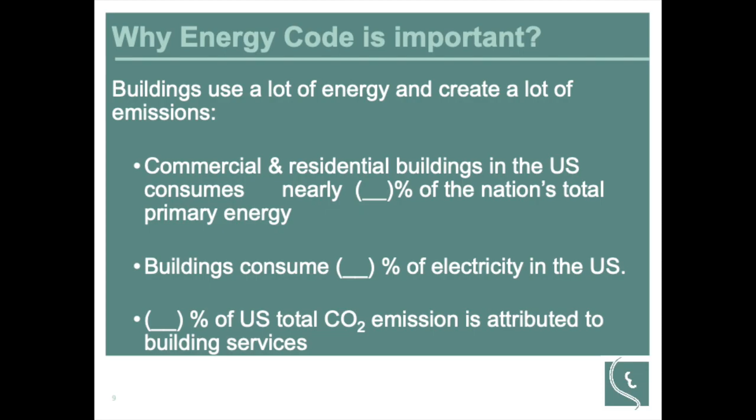So what's the benefit if you comply with the energy code? Based on DOE research, if all buildings in the US comply with the current energy code and keep that trend, it will reduce energy consumption by 3.5 quad BTU per year, reduce CO2 emissions by approximately 3%, and save almost $30 billion by 2030.

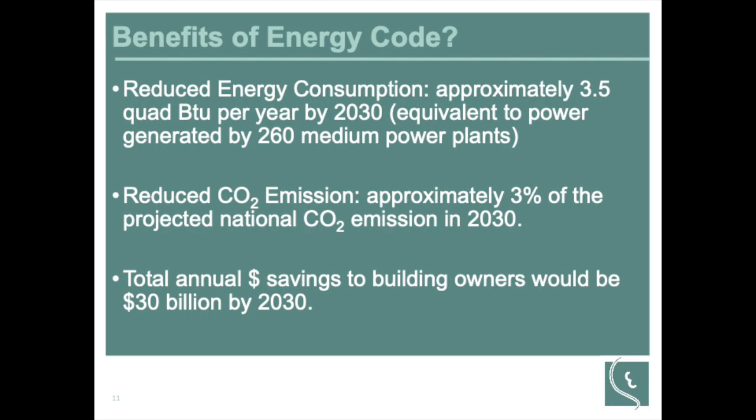Now we're going to talk about the Illinois Energy Conservation Code, which is slightly different from IECC. IECC, International Energy Conservation Code, is the model code, the standard code. But Illinois Energy Conservation Code is slightly different from IECC, and we're going to talk about how and why.

This is a good website to learn the basics of Illinois Energy Conservation Code: the CDB, Capital Development Board, website. They're in charge of adopting and processing that legal stuff in Illinois. They describe the Illinois Energy Conservation Code as requiring design and construction professionals to follow the latest published edition of IECC and ASHRAE 90.1, including amendments adopted by the CDB.

State-funded facilities must comply with ASHRAE 90.1. Privately funded commercial facilities, so all commercial facilities other than state-funded, must follow IECC. And residential also follows IECC. That's the big picture of what Illinois Energy Conservation Code is and what model code you're supposed to follow.

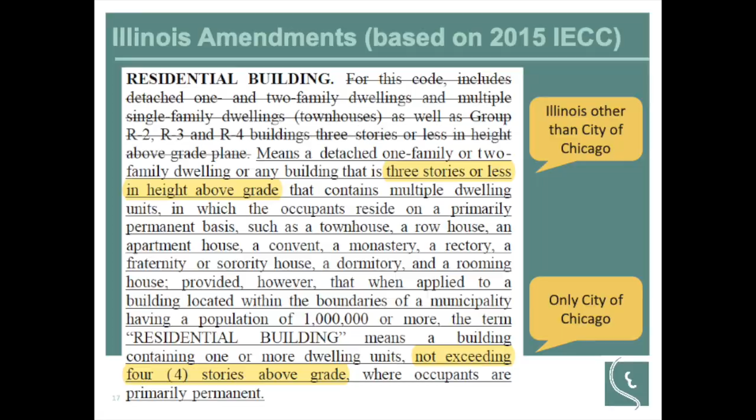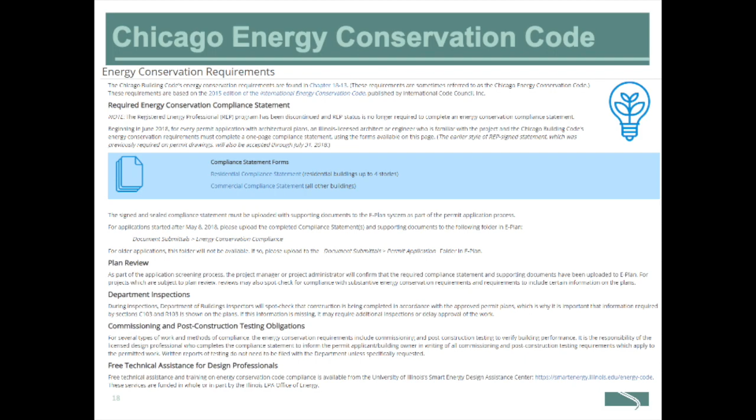So this is a screenshot from the Chicago Building Department. It explains well what the Chicago Energy Conservation Code is and what process you need to go through to get a permit. We'll talk about the compliance statement form later in more detail. I want to point out the last item: free technical assistance for design professionals. It says this is done by U of I SEDAC, which is us. In Illinois, for energy code training and technical support, we are the hub. So if you have questions, let us know.

This is an example of the Chicago Energy Code or Chicago Amendment. They're just changing some language, saying code official, City of Chicago department of buildings, or building commissioner. In terms of historic buildings, if it is listed as a Chicago landmark, or listed in the Chicago Historic Resources Survey, it is considered a historic building in Chicago.

Another important thing in the Chicago Building Code is the roof solar reflectance and thermal emittance. That's the IECC section. Chicago amended this and gave it a different name, calling it the Urban Heat Island Provision. Originally the IECC section only applies to zones 1 and 2, I believe, but Chicago now says if your project is in Chicago, you need to follow this heat island provision. This is a requirement, and there is some requirement language here. The Illinois amendment doesn't have this - only the Chicago amendment or Chicago Energy Code has this one.

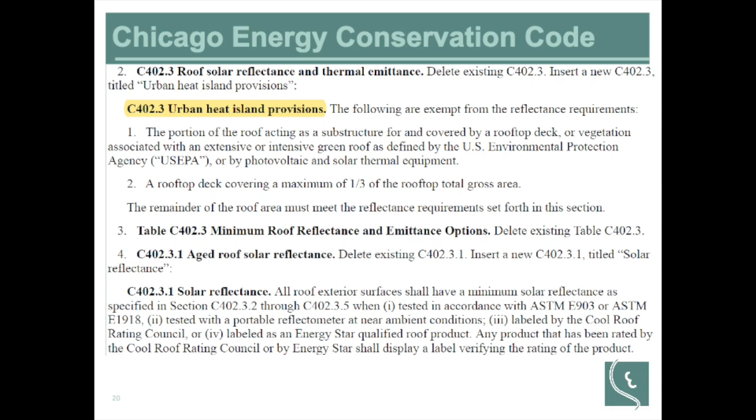Another big change I want to mention - how many of you are familiar with REP, Registered Energy Professional? Great. So now it's gone.

Before, to process your permit or plan review, what you needed was this one-page document signed by a REP, which is a Registered Energy Professional. A Registered Energy Professional is a licensed architect or engineer who went through at least one energy code training - then you are REP. The Chicago Building Department used to keep a list of REPs, and you could only sign this document if you were listed there.

Now they changed it. This change happened in June 2018, so this is pretty new. You don't need to be listed as REP anymore. This is a new form you can download from the Chicago Building Department. What has changed is the language is kind of similar, with your contact information, and you still need to be either a licensed architect or licensed engineer, but there's no requirement for you to be listed as REP.

They added this compliance method here, which I think is a great idea. Effective June 20, you need to use this form. As I said, there are two forms, one for residential and one for commercial. The top part is the same for residential and commercial, but the bottom part is different.

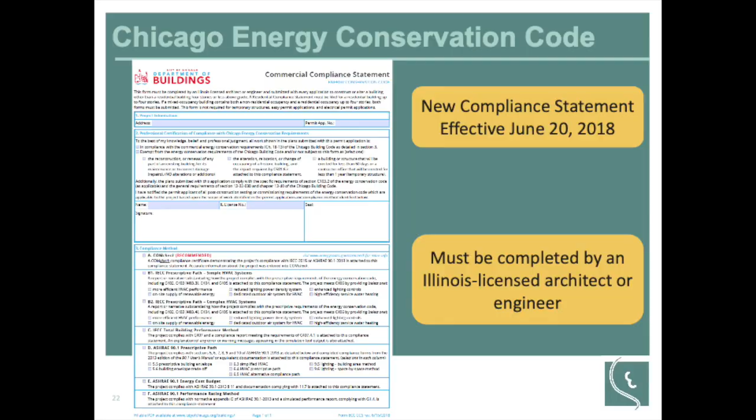If I blow up the bottom part for commercial, it's a compliance method. You need to check which compliance method you are using to comply with the Illinois Energy Code - only one, right? Correct, you check only one. It's either COMcheck, which is recommended - I feel like probably 80-90% of projects do COMcheck. But if you want to do other than COMcheck, you can check either prescriptive path, and there are two under prescriptive path: simple HVAC or complex HVAC. So basically either COMcheck, prescriptive, performance, or ASHRAE 90.1. You pick and choose what compliance path you are choosing, and then you need to show documentation that you are complying with those requirements.

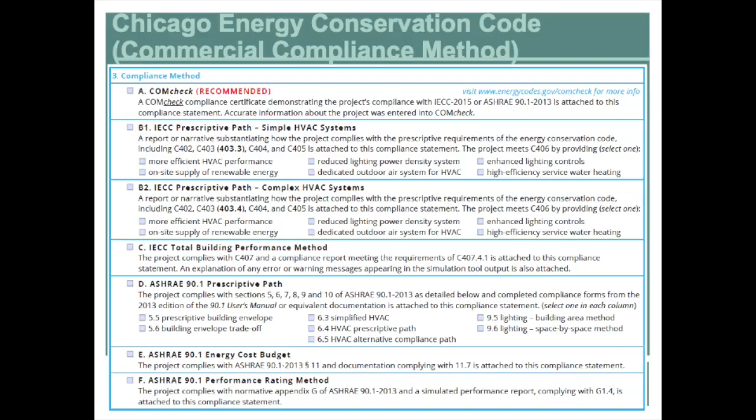For residential, similar things - you either check REScheck, which most projects submit as a REScheck report for compliance, but if not, you can do prescriptive method or performance method. Under performance, there are two: simulated performance method, and energy rating index. You can think of these two as performance, meaning like energy code. The last one, ERI, is a HERS rating. So if you're doing HERS rating, and that's the compliance path you chose, then you check this.

The part I like in the residential form is they have a snapshot, very short, that says the following mandatory provisions also apply to all residential projects - meaning no matter which path you are taking, these are mandatory. There are some lists of sections; it doesn't explain all the details, but it's a good starting point for you to make sure you comply with this.

Currently, the city of Chicago doesn't really enforce duct testing or blower door testing. However, it's mandatory. Can you speak at all to that?

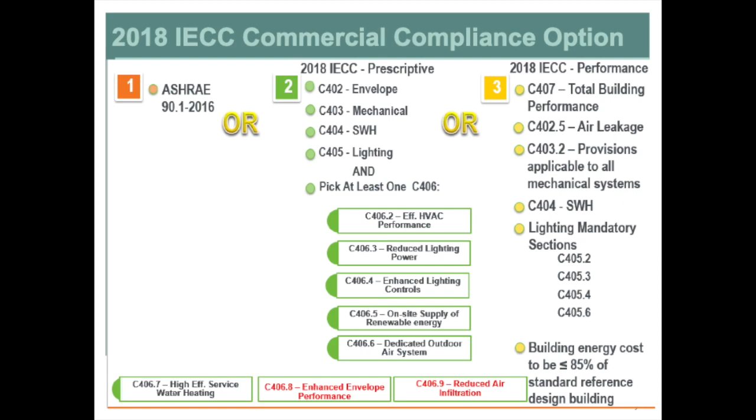For residential, in terms of big picture, there are actually 2 paths: one is prescriptive, the other is performance. But inside the performance path, there are 2 different performance paths — one is simulated performance, and the other is ERI, which is HERS. So if you go through prescriptive, you need to follow all the prescriptive requirements as well as all the mandatory requirements.

How many of you have worked on a project following the HERS rating compliance path for residential? How many of you are interested in residential provisions of the energy code? And commercial? Okay, so we're going to cover both commercial and residential, but probably spend more time on commercial.

So those are the two big compliance paths, commercial or residential. But sometimes knowing whether you need to follow the commercial or residential provision isn't clear cut. At least it wasn't for me, so I want to go over this to make sure we're on the same page.

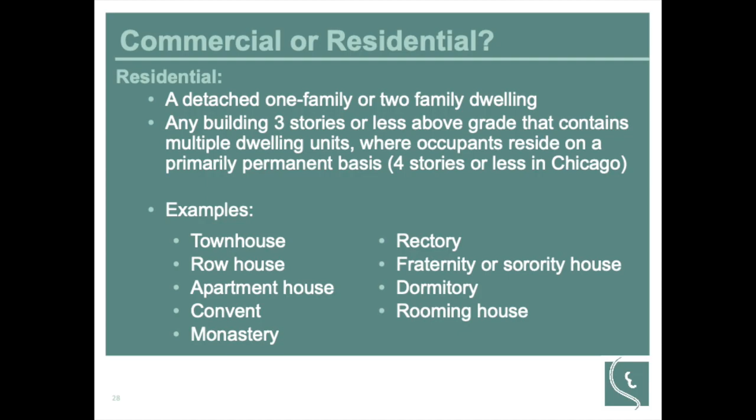So to give you a small quiz: there's a 5-story mixed-use building with 2 stories of retail store and 3 stories of apartments in Chicago. Is this a residential or commercial building? Commercial building, because it's mixed use and more than 4 stories.

Easy. The second one: a 3-story mixed-use building with 1 story of retail and 2 stories of apartment in Bloomington. Commercial or residential? Commercial? Excuse me, it's actually a mixed-use residential building. It's a little tricky. It should be clear cut, but sometimes it's not.

Third one: a 5-story single family home. Commercial or residential? I think everybody gets hung up on the 5 stories, but it's single family, so it's unusual to see a 5-story single family home. But if there is one, it's still a residential building because it's a single family house. Technically, if it's a 10-story single family house, it's still a residential building, so you need to comply with residential provisions.

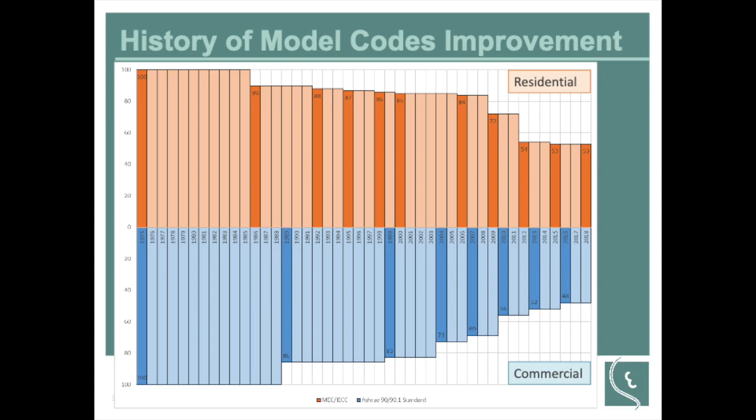So, the 2018 IECC - I know some of you are probably a little disappointed we didn't hand out the 2018 code books, but unfortunately our funding doesn't cover books for everybody. Good news is if you go to the ICC website, or come to our website where we have a link, there's a web version of 2018 IECC. You can scroll down and search for keywords, which is very convenient. But you cannot print, you can only look at it on the computer. So at least there's a resource for this.

A little bit of highlights on changes for commercial provisions of 2018 IECC. If you remember the graph, the energy consumption is almost the same. In terms of commercial provisions, it's about a 2 to 5% improvement compared to the previous version, which is 2015. As for the mechanical section, I think IECC is personally better than ASHRAE 90.1 in terms of complexity, but it's still very confusing and complicated.

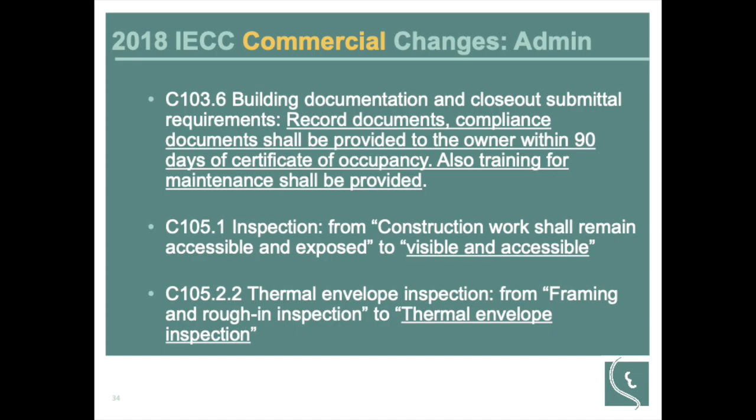Another small language change: there's a thermal envelope inspection. It used to say framing and rough-in inspection, and now it says thermal envelope inspection. I take it this is more comprehensive—not just framing and rough-in, but making sure all the air barrier or vapor barrier, the insulation, no thermal bridging, so there's integrity in the whole thermal envelope.

And then another big change, code official. Do we have code officials here today?

No, none. There were 2 signed up. They didn't come.

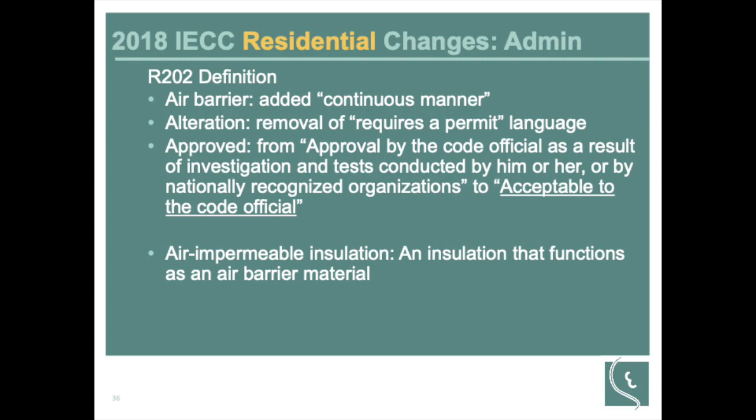So looking at the commercial, most of you guys are interested in the commercial side of things. But I will call out for some of these slides where I have black text up in the left corner. This is not a change, but it's something that we wanted to call out as a very important factor.

This is a question that we frequently get: can I do this without complying with the thermal envelope provisions, and can I get away from some of the insulation values? We point back to this and say, well, you might, if you can qualify as a low energy building or portion thereof. This gives the definition under 1 watt per square foot.

Have any of you been doing much in the way of passive house construction or design, or familiar with passive house? A couple more for passive, at least familiar with it. This is getting down to about that level that they look at. I believe Passive House looks at under 3.2 BTUs per square foot, and this is 3.4.

This is something that, if we're going to get to net zero, is going to have to become much more common practice rather than the exception to the rule. But if you're under this threshold, that simplifies things a fair bit.

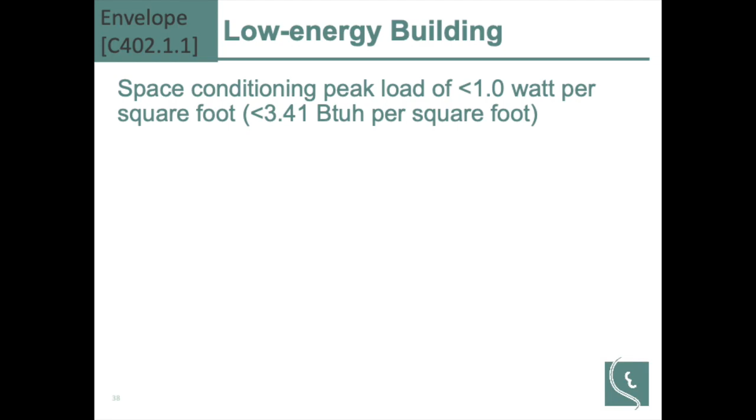So here's a question that came in: how does it apply to buildings without heating? There again, with the IECC, it notes that if you're low energy, you don't have to comply with the thermal envelope provisions, but the rest of the code still does apply. So you still have to have good lighting and good HVAC systems.

However, we do note that if you start this as a low energy building, say I'm going to build a building shell but I'm not going to put any air conditioning or heating in it, particularly warehouses and things like that, where one firm is going to build it and then rent it out as space to others, so they're not going to condition it when they do the construction.

That can be fine, but when your tenant moves in, if they want to condition that space, going back and complying with that thermal envelope provision, if you didn't when you did construction, that can be very costly and expensive to do. Particularly if they say I want a heated slab, because as we'll touch on in a moment, you now have to insulate under that slab. So you're going to have to rip the whole slab out in order to do it.

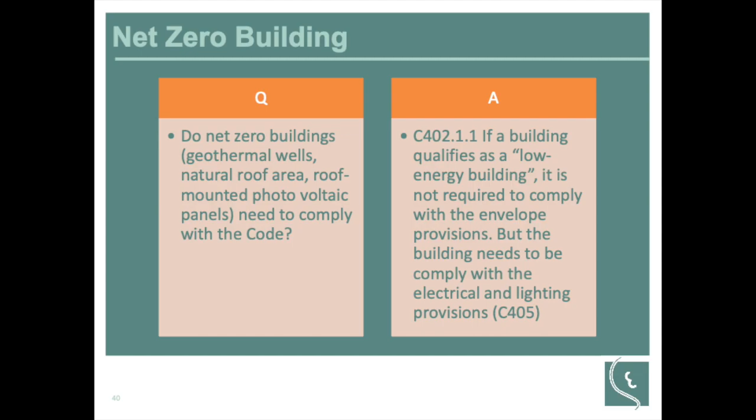This was another one: we are going for a net zero building, do I have to comply with energy code? Again, we can point back to the low energy building. It seemed like a strange question to me, and you guys might agree or disagree, but if I'm going for a net zero building, then saying, do I have to meet the minimum standard? That was a little bit weird.

So this goes back to the heated slab that we talked about. Now in the 2018 version, if you have a heated slab, you have to insulate under it a minimum of R5, so typically probably 1 inch of foam underneath that slab.

Does that mean if the building is conditioned with heat in there, or do you actually have to be providing heat using the slab? So that's probably going to be a radiant slab, not just a slab in a heated building, but you're actually putting the heat directly into the slab.

There again, they say a minimum of R5, that's 1 inch of foam. Any ideas what it might cost to put a 2-inch piece of foam down there instead of a 1-inch piece? Now you're getting into comfort and saying, can I build a better building that's going to be more comfortable? Yes, I have gone beyond code to do it, but this may be one of those where if you're doing a COMcheck and you may want to trade something, I'd much rather provide a more comfortable building using some of that.

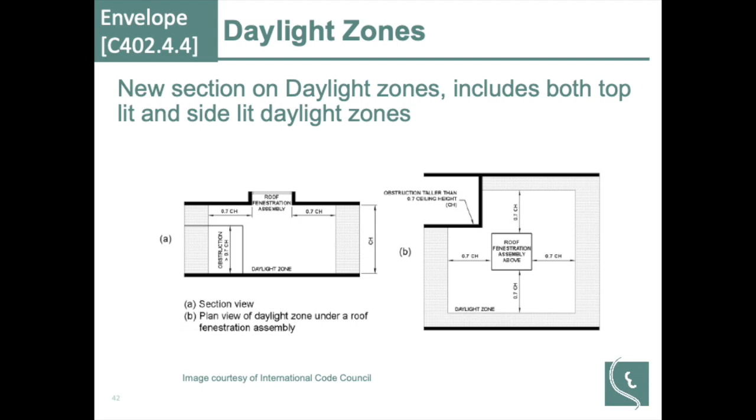So here's something where how it may appear on a drawing as far as identifying, and this is required in the documentation, is you have to identify your top lit and side lit zones on the floor plans. So in this, we've got some windows here. I don't have any skylights in this building, so I don't have any top lit zones in the core of the building. But here you can see the side lit zones coming in, and depending on if I'm over the wattage threshold, I may have to install daylighting controls in here.

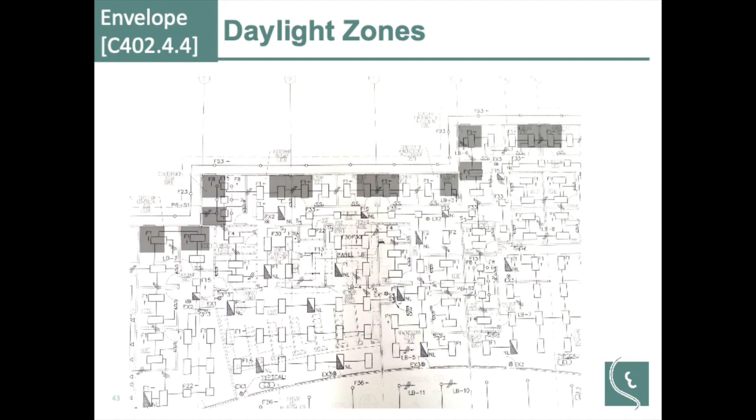So, air sealing. I think it's probably something where we've kind of understood practically that air sealing has to be able to be maintained for the life of the building, not just the day I put it in. And so understanding that the air sealing has to be able to allow for the expansion, contraction, shifting, vibrations of the building without cracking and defeating.

I can use drywall with some mud on it to provide air sealing. However, when you do, over the life of that building, as cracks develop, your air barrier is failing. And that can cause you some problems going forward in your building. Again, trying to look at these buildings from a lifetime perspective. We don't want to build buildings that are only going to last and stand for 10 years.

You know, how many buildings out there do we see where they were built 10 years ago and they're failing? And then you look at several buildings out there that are built 50, 70, 80, over 100 years old, and they're still standing and they're still in good shape. And so trying to take that into account and say, how do I make the building withstand the forces that it's going to see over its lifespan, and make buildings that will stand the test of time.

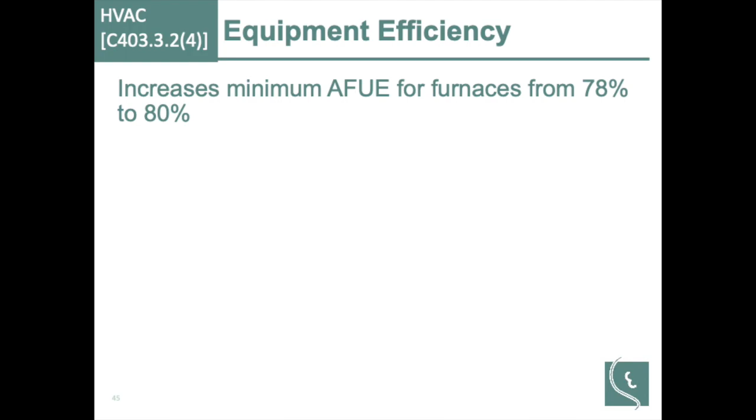Looking at boilers and controls therein. Up here, how many of you deal with a lot of boiler systems in this region? A couple? Few? Okay. It's not very common down by where I live, but I realize up here it's probably a little more common.

So doing away with pilot lights, I think sometimes with some of these, the code is catching up to what manufacturers have been offering. And so, things like a standing pilot light, I'm sure there's still equipment out there that offers it, but it's probably going away. Hot water reset temperatures built into a boiler. This is probably a little more something that may have to be more specified.

Heat rejection closed loop systems using cooling towers. They're now delving a little bit more into the controls therein, looking at how to bypass this in the winter so that I'm not unintentionally rejecting heat outside in the middle of winter when I'm trying to heat the building. So having some of this in place, bypassing and shutting off the pump when I don't want to get the water outside to throw away the heat.

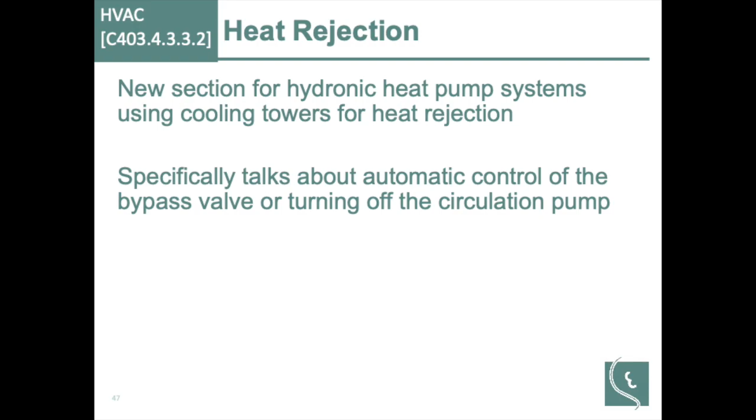VFDs continue to expand, price continues to fall, which makes these more and more economical in more and more locations. So now it's down to 2 horsepower and larger. If you have full DDC controls, you may be able to use something a little larger, upwards of 5 to 7.5 horsepower, and still not have to have the VFD. But it talks specifically in the code book about where those are.

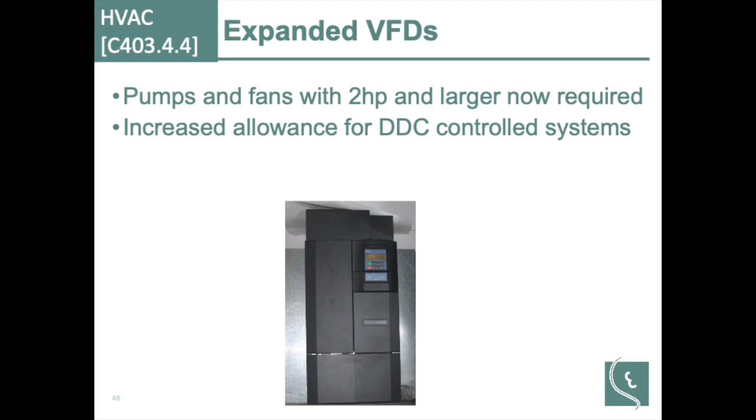Yes, I understand that humidity control is important, because without humidity control we cause mold, and mold is the bane of a building's existence. If it can't dry, it will die. But we're trying to minimize the amount of energy we spend to keep that done.

So code's now talking a little bit more about parallel flow VAVs, trying again to minimize where I'm using that heat, to minimize the reheat valve and minimize the reheat.

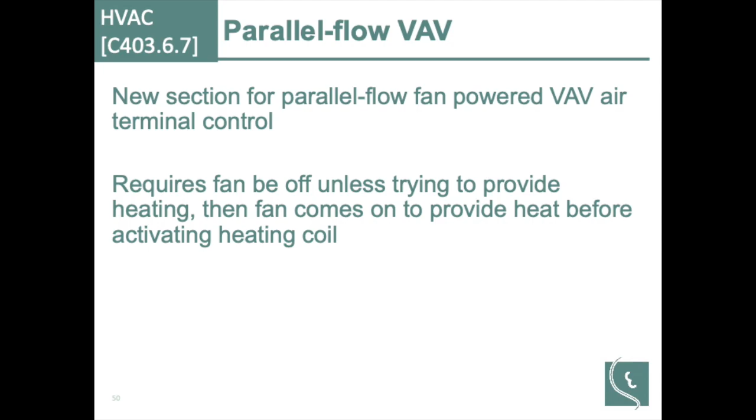A lot more controls are now mandatory for ventilation systems. Another area we hear several questions about, particularly up in this region, is parking garages. When you have fully enclosed parking garages, you are now getting into ventilation controls, making sure you have demand controlled ventilation on there, along with frequently heat recovery. Because if you're going to be operating over 8,000 hours a year, you're now into heat recovery for your exhaust systems.

There's a lot more demand controlled ventilation, particularly kitchens is another place we're seeing it more and more, and also guest rooms. They've now reduced the number of guest rooms you need before you have to qualify for this, and system sizes, and getting better dampers. It's now requiring Class 1 low leakage dampers for outside air dampers and exhaust dampers. So that's something that continues to progress forward.

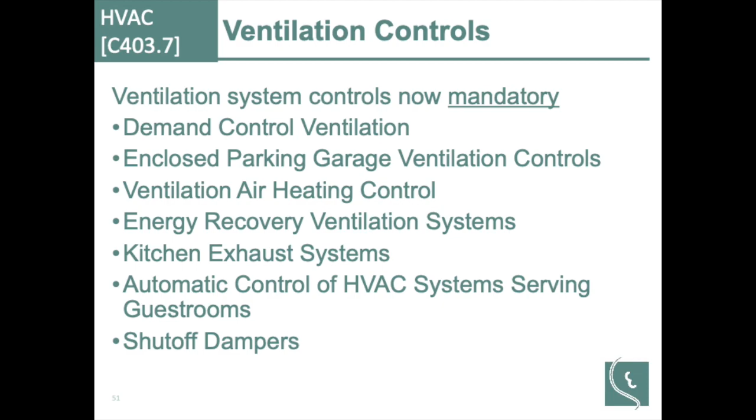We also have more heating controls for ventilation systems, trying to reduce, again, we don't want to throw away heat that we've generated unless we have to. They're also trying to provide a little more guidance. Another one in there is vestibule heating - they are now providing better guidance as far as how to do that. The code is now talking about vestibules being tempered spaces; they are not trying to provide full building heat to them. I believe it now calls for 60 degrees to be the setting for vestibules, and no higher, at least for heating.

This is one place where the energy code has gotten a little more relaxed, and that is if you have ventilation operating over 8,000 hours a year, there's now some minimal amount of exhaust air allowed. Before, the limit used to be zero. So if you had an exhaust system that had 5 CFM of air operating continuously, you had to do heat recovery for those 5 CFM. Needing to do it for 5 CFM was getting problematic. So this does give a little bit, though not a whole lot - even on the top end, you're still only talking 200 CFM as your threshold. So it's still very tight, but at least it gives you something.

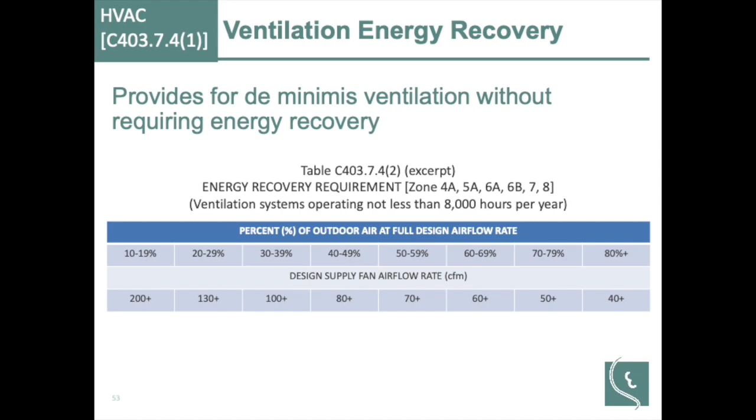This is another one where they've given a little better guidance as far as this pressure drop allowance for your HVAC calculations. It was a little less clear as far as, it's now for each air stream they provide that allowance. Before that was a little more murky.

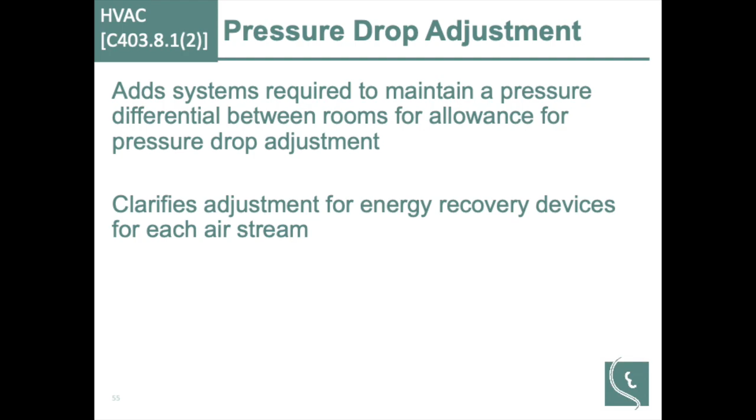Motor nameplates, this is something else that goes on building prints. If it's less than 1 horsepower, it doesn't have to go on the building prints, so your fractional horse motors, but anything 1 horse and larger needs to be on those building prints. Part of this is, if I go to replace something, we've all experienced that, where you go to try to read the nameplate of some of the older equipment and it's kind of worn away. So you're trying to figure out, okay, what are the specs of this motor? Having that on the building prints is helpful just in case. Of course, then you have to be able to locate your building prints.

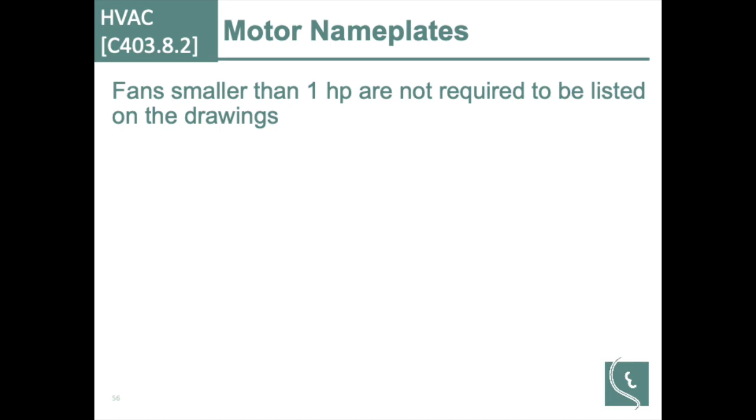Also providing further guidance as far as heat rejection and fan controls. So for your cooling towers and the like, providing guidance as far as actually varying the fan speed based on what your temperatures are. Going back to that VFD of 2 horse and larger, this is probably going to be most things.

Refrigeration equipment, they're increasing the efficiency. Something else they call out is that for walk-in coolers, there's a new efficiency standard that's going to take effect in 2020. So this is a mid-cycle change. It's already in the 2018 book that takes effect January 1 of 2020, which is also a little complicated because here in the state of Illinois, the 2018 code becomes effective March 1st, 2019, and now you have another code rule that's going to take effect January 1 of 2020. So 9 months after the code takes effect, a new rule comes into place. That is on walk-in refrigeration. So that's something I do want to call out to be aware of, there is that extra little twist in there.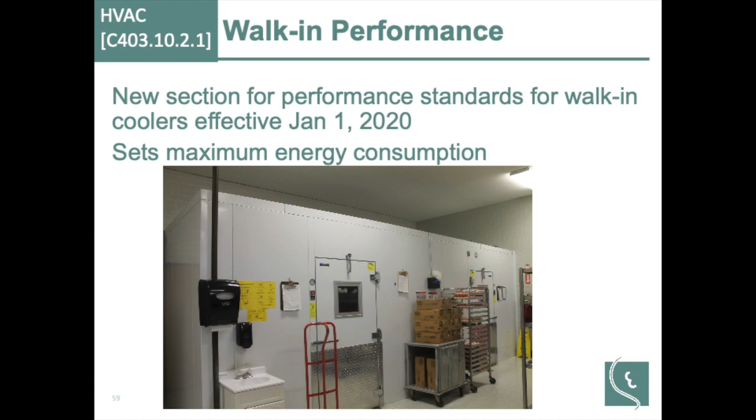So this HVAC construction, Sumi had talked about, there was a lot of reorganization in here. They've tried to consolidate a lot of this material together. The other reason they did this is all of these sections are mandatory. And so mandatory requires you to comply no matter whether you're using prescriptive or performance-based. You have to follow the mandatory provisions.

So now I'm calling out that you have to duct seal unless the ducts are fully within the conditioned space inside the thermal envelope. So there is some ability there. And also piping insulation is becoming required. They call that out in the book. What questions, other questions we have to this point?

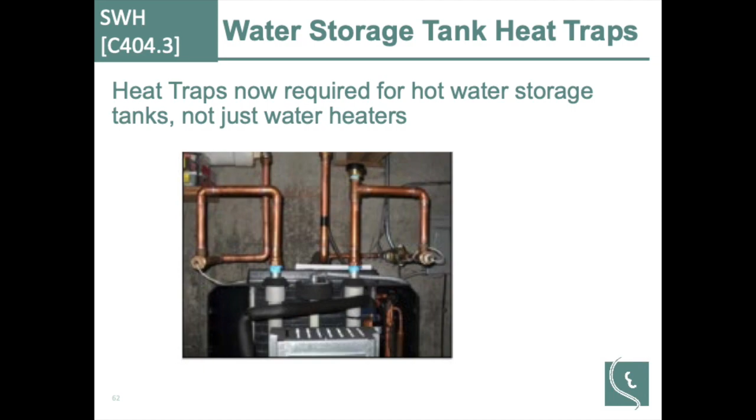Pool covers are continuing to push higher as far as when you have to have a pool cover for new pools. It now has to be 75% site recovered energy, whereas before it was only 70% site recovered.

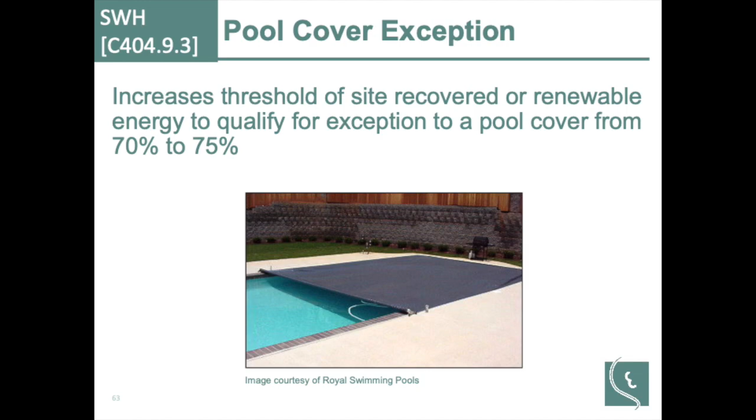Service hot water heating no longer has to do commissioning on the systems. Part of that is because they've called out more specific controls of time and temperature in the code, so you don't have to have a lot of complexity to the systems to make them work.

Residential lighting, residential provisions for lighting, which is high efficiency lighting, is only for multifamily buildings in the state of Illinois. So if you are in the commercial provisions, the only time you're allowed to go over the residential for lighting provisions is in the event you're in multifamily. Otherwise, you have to use the commercial provisions.

Are any of you doing much in the way of luminaire level lighting controls? Some. This is where every fixture has an occupancy sensor and a daylight sensor built into it, which has pluses and minuses. Instead of having centralized lighting controls, you can now do them at the luminaire level, where every fixture has its own sensor and responds to its own independent signal. This can simplify things and make things much more expensive at the same time, depending on how you do it. But we do call out that it must contain both occupancy and daylighting controls in the fixture - it can't be one or the other, it has to have both in order to qualify as luminaire level lighting controls.

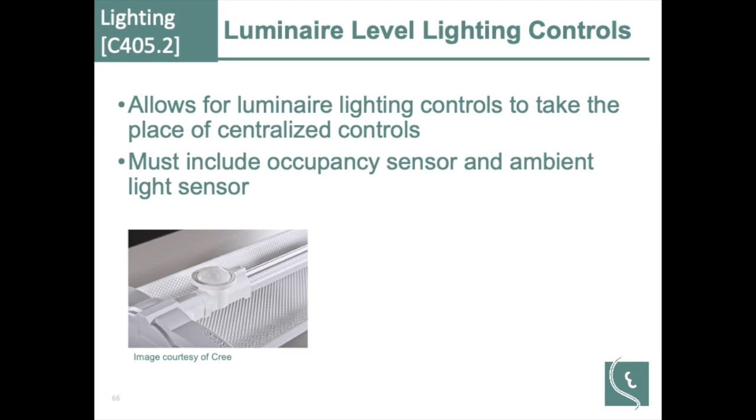Occupancy sensors continue to be a growing area now for open plan offices, and there's even requirements as far as how big the zones can be. I believe it's 600 square feet per zone that's allowed for these open office areas. So it's mandatory now? It's now becoming required, yes.

Occupancy or vacancy sensors? Good catch - vacancy sensors, sorry. Yes, that's another thing they've moved towards: occupancy sensors are only required in a handful of locations now. They require vacancy sensors for most applications. I believe occupancy sensors are restrooms, hallways, stairwells - trying to think if there's any others I might have missed. But yes, vacancy sensors are now the standard, which is a little strange when you go to the store to try to buy a vacancy sensor and they don't carry them, so you have to order them. Not only for open offices, now lounges and break rooms and warehouses - they now call out the storage area of a warehouse specifically, because you may be in a warehouse but not actually in the storage area. You're probably in an office area or a hallway or other things. So they've clarified that warehouse means the storage area.

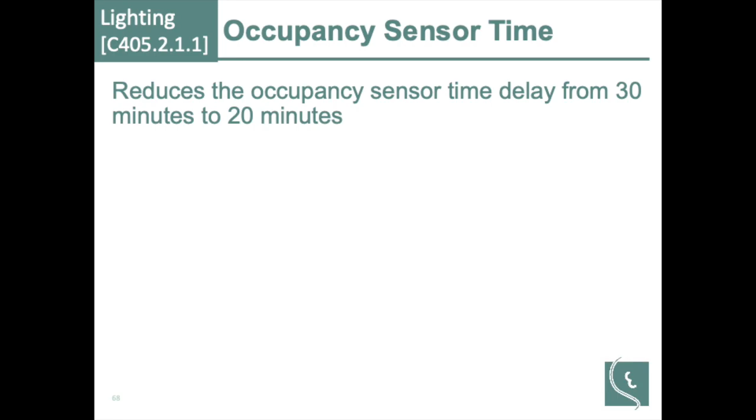Daylight responsive exception. This is one I think is extremely helpful and can be very beneficial. If you meet this threshold, you don't have to have daylight responsive controls for the building. What this means is you have to reduce the wattage by 40% of the area that is in the daylit zone, which sounds a little confusing. But for our example, if half of our total floor is in a daylit zone, either top lit or side lit, and I am 20% lower than the total wattage budget for the building, I've met the threshold. So if my total lighting budget is 100,000 watts, and half the building is in the daylit zone, if I am at least 20% lower than 100,000 watts, or 80,000 watts, if I'm below that threshold, I don't need daylighting controls. Done.

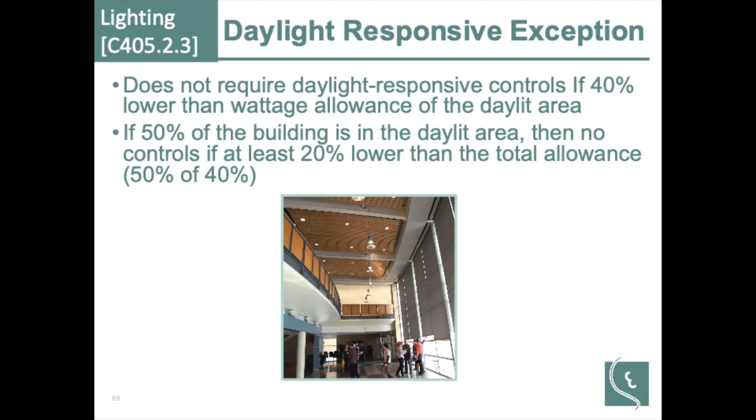Can daylight controls be manual controls, like a dimmer switch on the wall? No, unfortunately not - they have to be automatic daylight controls.

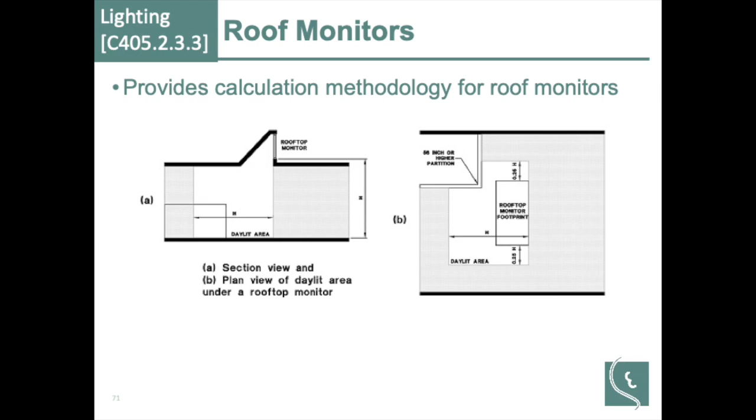So this was talked about earlier - captive key switches are no longer allowed for sleeping units. But we went over 3 different ways you can do it: occupancy sensor, hotel management system, or key card. There we go.

Exterior lighting controls. Previously, you had to have daylight shutoffs, photocells, or time switch controls. Starting with the 2018 code, you now need both. This could be a single system that provides both time switch and photocell, or it could be 2 controls in series. The only requirement is you do have to have both.

They now require that you turn off decorative lighting overnight during non-business hours. I believe the code does allow you to keep it on for 1 hour after closing, so people can see it as they leave.

What about automobile dealerships, does that count as 1 hour after they close? That wouldn't probably qualify under decorative lighting. However, they would fit under this 30% turn back, so you could turn off 30% of the watts, or you could put in dimming fixtures and just dim them back.

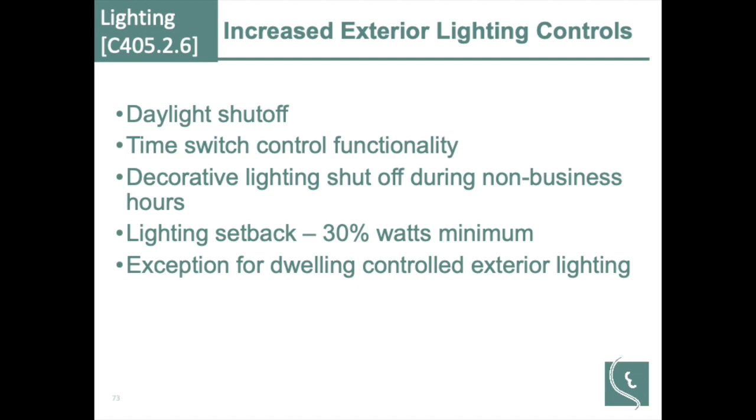There are exceptions for security lighting that is approved by the code official. Another way we have seen this implemented with this lighting setback is: building mounted lighting and close-in parking lot lighting can be dusk to dawn, and the ones away from the building, you go ahead and turn those off, because no one parks away from the building anyway.

Track lighting. This is one that reduced for your lighting power calculations, your total connected power. For track lighting, it used to be 30 watts per linear foot of track. It's now down to 8 watts per foot for your calculation. We suspect part of this is because of high efficiency lighting continuing to improve. If you tried to put 30 watts per foot on that track, you would have a whole lot of lights. Even with 8 watts per foot, you can still do a fair bit of lighting with that.

Is that just for offices or is that different with retail? This is the commercial power calculation, across the board. Now, this is the default value. If you have more connected power on that track, you have to use the higher value. But if you have a lower amount of actual track lighting... in retail, yeah, you could have 30 watts per foot because you've got to showcase your product. But you have to use the higher of either the default value or the actual fixtures that are on that track. That's another good thing to point out.

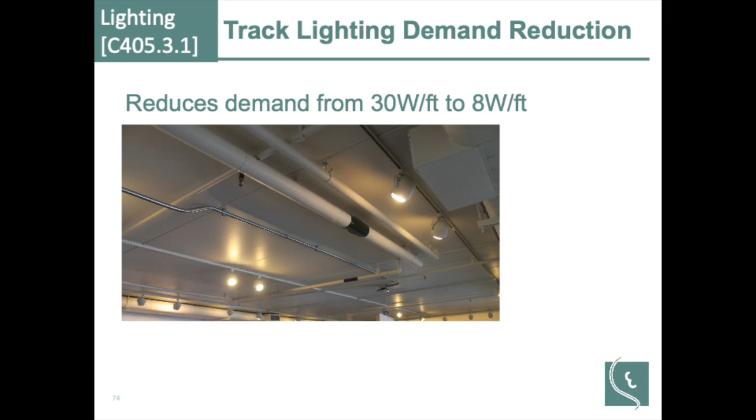There are now a few more exceptions as far as what is in your exterior lighting power calculation. So again, we noted your security lights, and for safety, your entrance and egress is probably likely to be approved. Emergency lighting that's not on during normal operation and exit signs have now been removed.

Make sure you light your national flag. Is that for emergency? What's that for? Well, your national flag, you just want to make sure no one says, well, I would have lit it, but I ran out of power, I couldn't put the 100 watts on it.

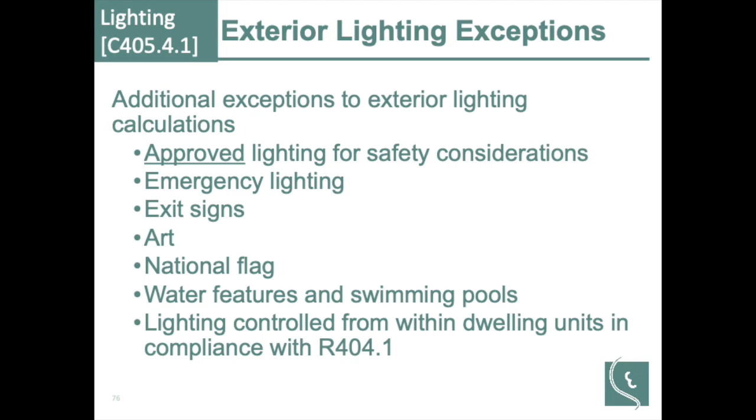Again, similar to the interior power allowances, the exterior's falling a little bit more too. The street lights, the water features and swimming pools - do they qualify, is it all the light of the water feature, or is it decorative, or is it safety, because I have a water feature that has a lot of light, so it has to be on safety? Again, this goes back to whether this is in your power calculation or not, as far as what you're allowed to use for exterior lighting. If it's for a water feature or a swimming pool, it's not part of your power calculation.

We don't see too much of this around here, but I know City of New Orleans has a lot of this. But if you have natural gas lighting, no standing pilots.

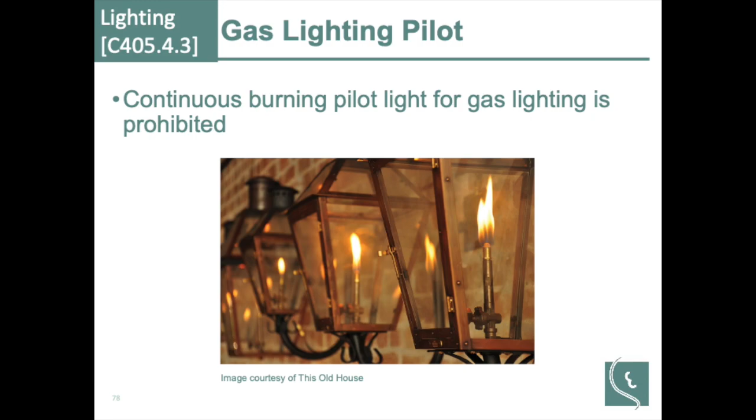Again, march for efficiency - transformers and motors. Transformers now have to be DOE 2016 efficiency or better, and motors have to be NEMA premium or better.

Here again, some of this is - when they come out with standards, I feel like this is almost one where the code is catching up to where the technology went. Because when DOE released their 2016 standard, I think most manufacturers looked at it and just started making it - they don't need to carry an efficient version and an inefficient version, unless someone's got some in the back stock somewhere. But yeah, so this is another one.

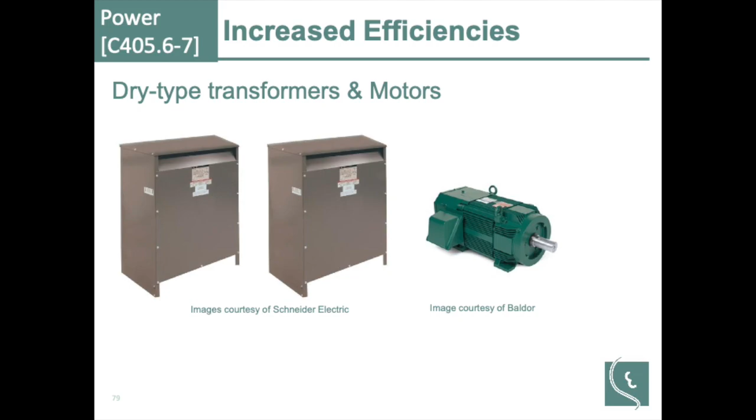We had talked earlier about the additional efficiency options. This is one of them as far as better building envelope - are you at least 15% better than the minimum in the table? So if you are at least 15% better than the standard in the table, because this is prescriptive, that's when these enhanced values come into play. So if I'm 15% better than the table, I can tick this box - I've got my enhanced envelope, and I'm good.

I can also do it by air tightness. If I have air leaks, that means I probably have humidity leaks, which means I might have mold or a higher chance of mold. So this is another option they give you - you can test your building to check the air leakage. Commercial buildings are not required to do a pressure test if they use the table of materials for their construction.

You can choose to do a pressure test and verify that your building doesn't leak, which I always think is a great option if you can convince people to do it. But they set the standard at 0.25 CFM at 75 pascals, so it's a pretty tight building here. Now they also have a provision that if you're over 250,000 square feet, you can test your building in sections, but the test must cover at least 25% of the building.

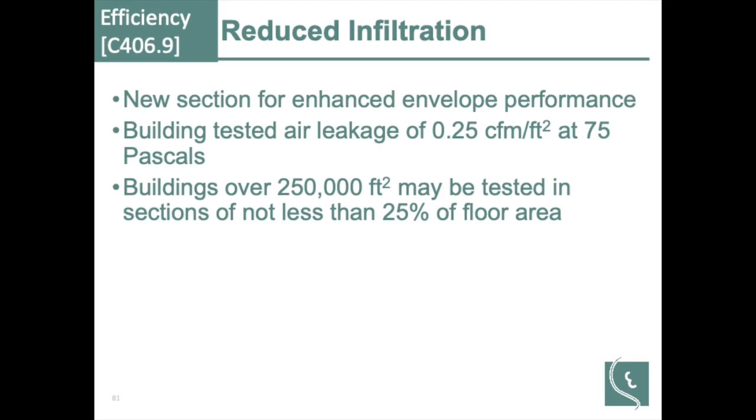Providing some guidance on electric vehicles. We are not putting the electric vehicles in the energy calculation because that's not part of the building, unless you want to. But yeah, they're providing guidance because we're seeing more and more electric vehicles, and predictions are we will continue to see more. But we're not going to try to put those in the energy model.

If you're doing on-site renewables, they're now limiting the credit that you can take at 5%, because they're trying to prevent what you see in the picture here. I can build a net zero greenhouse if you give me enough solar panels. So saying, we want good building design. We want you to have the ability to do on-site renewables, but we want the focus to be on good building design first.

The previous slide, about the 75 pascals in a very large building. I'm familiar with the BPI standards of 50 pascals. This is for a 1,000, 2,000 square foot building. It's a pretty good sized blower. My God, how big does the blower need to be for a 100,000 square foot building?

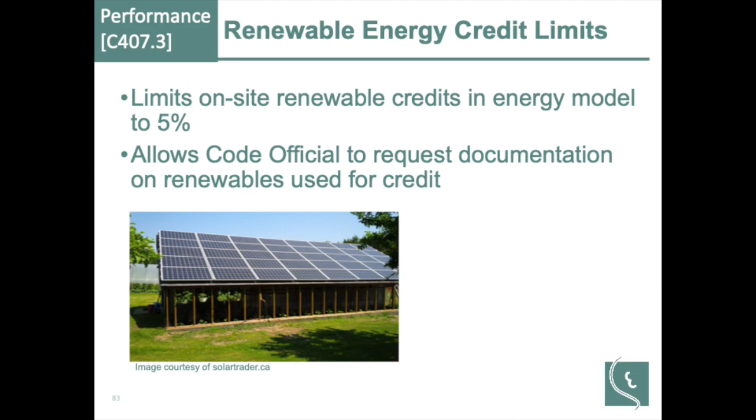O&Ms, the code now requires that you provide O&M documentation to the customer. It also calls out things that need to be in there, and that is there needs to be a page that lists what the O&M is. You know, you need to change the belt on this. And then you have to say, yes, you need to change the belt, and I have to tell you where in the O&M documentation that is. So it'll say, change the belt, book 81, section 3, so you can go to that to find out what you need to know about that belt.

A lot of times the O&Ms don't look quite even that nice. But looking at it, going back to, we want these buildings to last. Well, how can you get a building to last if you can't maintain it? And how are you supposed to maintain it if you don't know how to maintain it? So at least if you have a simple 'here's what the maintenance needs to be for this, and here's where you go get more information on it.' It's really hard to maintain a building without that, other than 30 years of experience on that building.

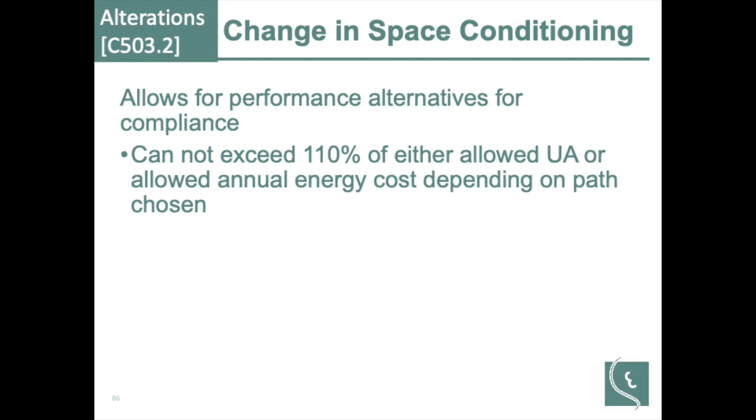So, excess fenestration. If you end up with an existing building, yes? How would you do major occupancy changes - the major change which increases energy consumption? Can you give an example of the change? The research lab, okay.

That is likely to be - either you're dealing with process loads, but it is with alterations. So you didn't go from unconditioned to conditioned, so you don't trigger that provision of the code. But with renovations and alterations, whatever you touch must meet the new standard. So in that case, you'd be hard pressed to meet the 110% with that.

But this 110% is if you are changing from non-conditioned to conditioned - that's what triggers this. So if you just change the space type, that's not part of this. If you change from offices to research labs, you're probably going to touch HVAC equipment, so whatever your new HVAC equipment is needs to meet the code standards, and the lighting and so on and so forth. Whatever you touch - but if you change the space and you don't touch the lighting, then the code doesn't say you have to go and touch the lighting to bring it up to code. At least the energy code doesn't.

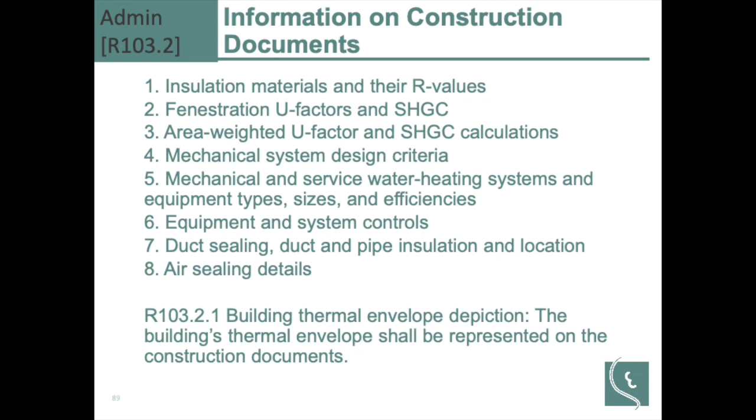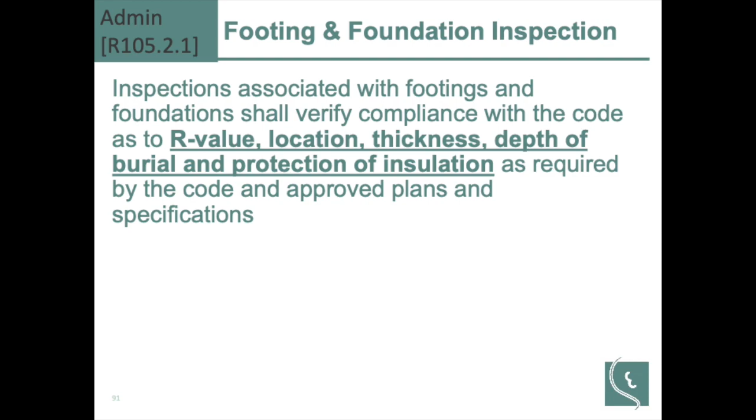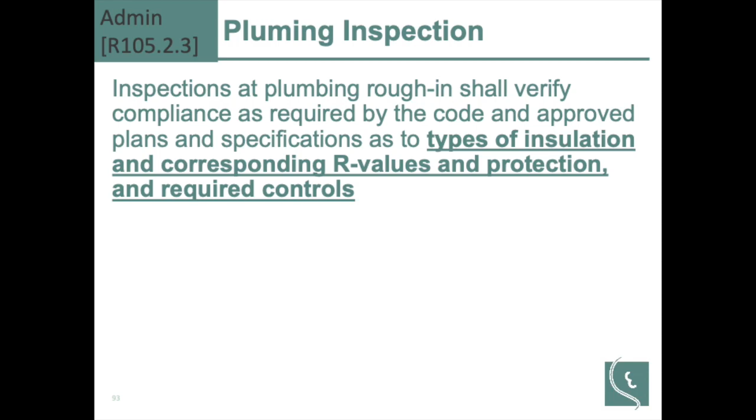So this talks a little bit about what's required to be posted on the documents for construction documents, when inspections occur. Again, being that we're here at University of Illinois at Chicago, a lot of this probably isn't going to apply terribly much because you're probably in a commercial building, and so these inspections would be in the commercial section. But we've underlined for residential inspections what the code inspectors are looking at, and this is straight out of the code as far as what to look for. What's your insulation, what's your thickness, do you have it there, is it protected, or is it all torn up already by contractors? Mechanical rough-ins, and then final inspection for occupancy.

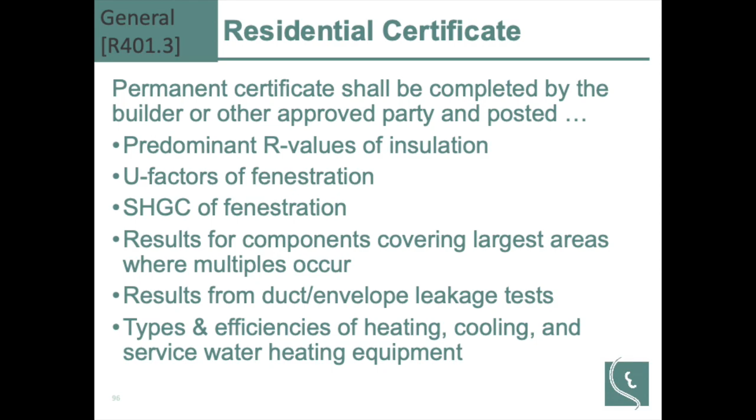For homes, this is just for residential buildings, not necessarily occupancies. I need a label that tells you what the major components are. And why might this be important?

If I change one of these components and use something that's a worse version, what might that do to my building's comfort, or heating and air conditioning? I need to know where this building started its life, because that little label that's on the window telling me how good of a window it is has long since disappeared. So if I have this label somewhere, typically located at the electrical panel because it's easy to find there, I know if I need a replacement window how good of a window I may want to replace it with. I may want to still get a better window than this, but at least I know I don't want to get worse than that.

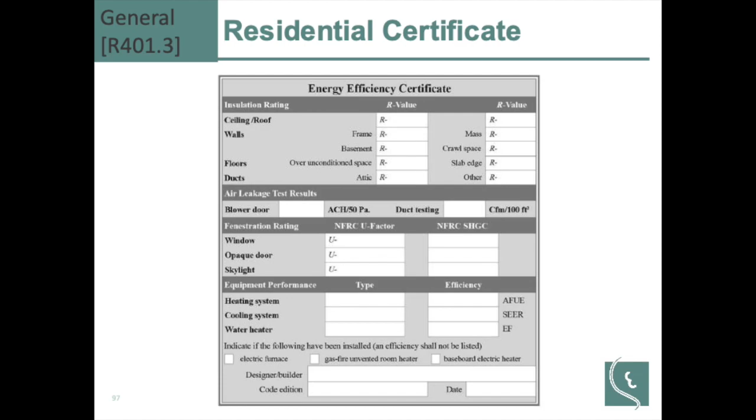The new piece in log homes: they have their own building standard. They're now part of the energy code. Rarely do we find that.

Windows are getting a little bit better. U-values decreasing slightly. Still not a whole lot of change here.

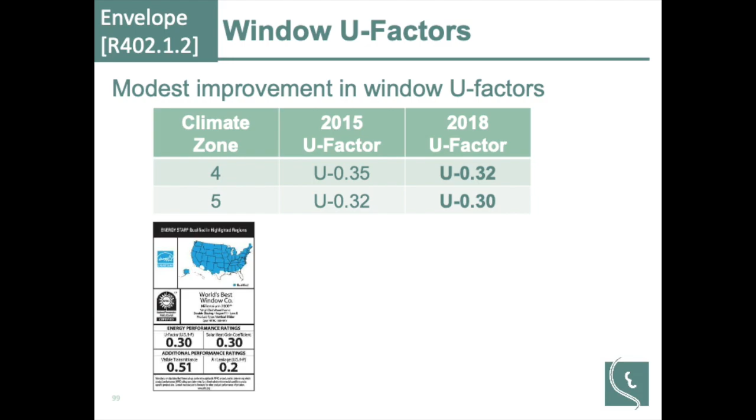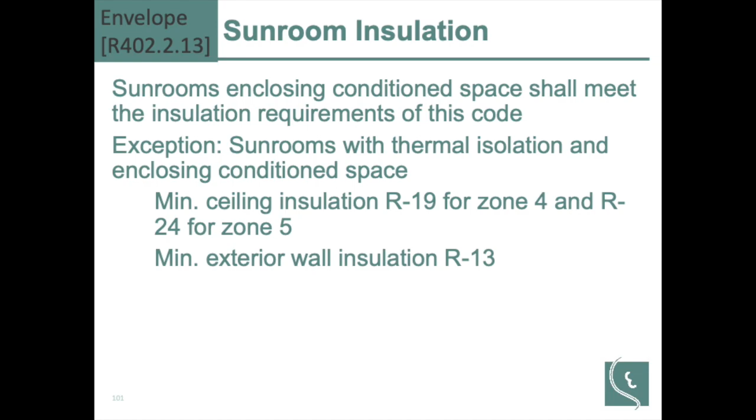Sunrooms, people love their sunrooms. They have specific requirements for sunrooms, again noting thermal isolation between conditioned and non-conditioned space. So if you are isolated from the fully conditioned space, you can get away with a little bit less insulation for a sunroom. If they're not isolated, full insulation, more fenestration.

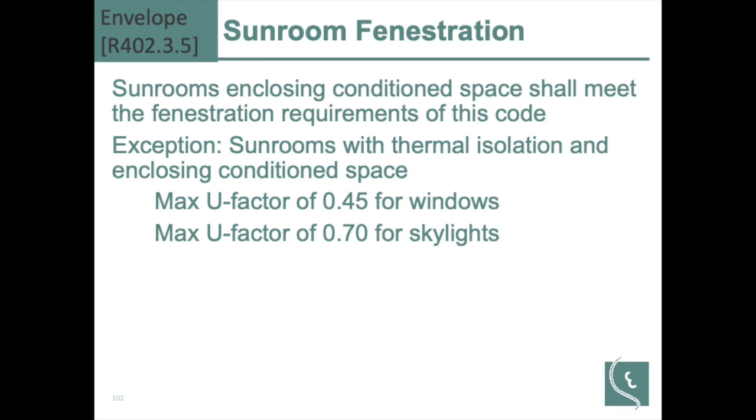Can we put a fireplace in a sunroom? Does it count for low energy? It's a heating source, fireplace counts. So if you want to put a fireplace in your sunroom, it is now conditioned.

The question was regarding a decorative fireplace, I believe it was decorative only. Can you find anywhere in the documentation that says it's decorative only and provides no heat? Then it's not decorative only.

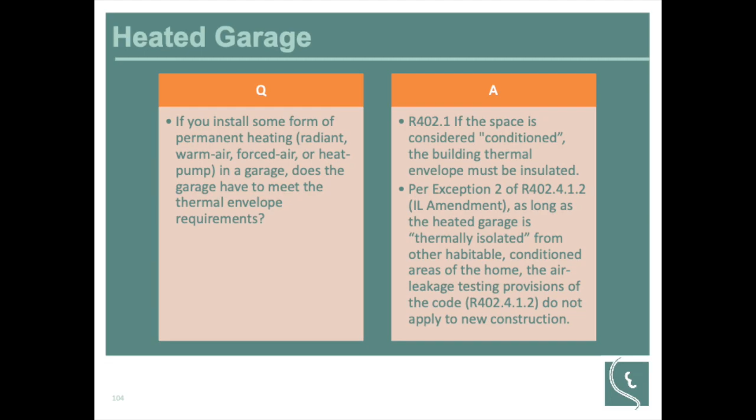Roof insulation. Now, if you're dealing in a residential building, not residential occupancies but residential building, they do not have a separate flat roof item in the table. So you still have to do R49, even if you're on a flat roof in a residential building.

Now there's a caveat to this for renovations. Renovations, it goes back to what is technically feasible given the existing conditions. Have you reached the maximum you can given the conditions? So even if you don't meet the 49, did I build it up as high as I could go? Then they'll generally look at it and say, you did all you could with what you had. Sorry, someone 100 years ago ended up messing you over. So yes, this technically infeasible provision comes into play frequently in renovations, because what can you do with what you have?

Moisture control: this is something that comes up with that heated slab and that insulation, protecting that insulation from moisture. That is not an energy code thing, it goes over to a building code issue. So for the protection of that insulation from vapor, you go over to the building codes to find that section. It's in the International Residential Code and International Building Code where you find those moisture provisions.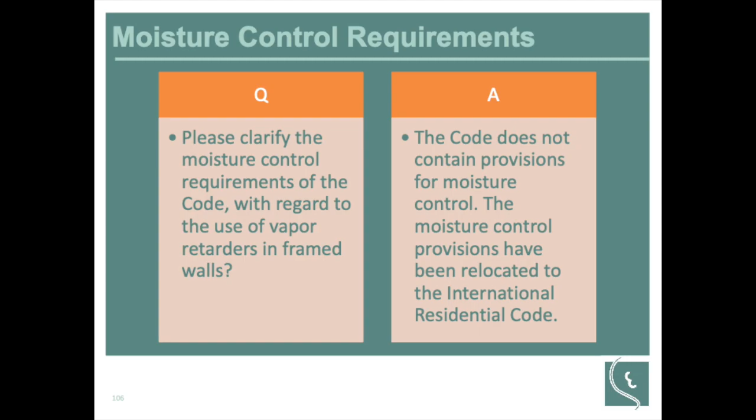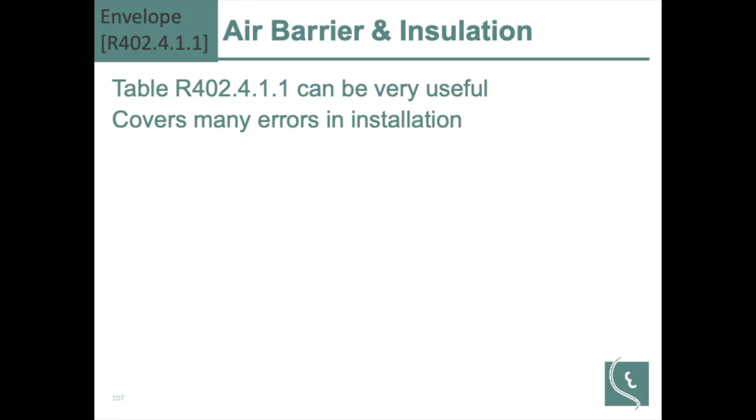If you are going through an energy model and performance path, the code now provides some guidance as far as how to treat fully buried ducts. This is ductwork that has the full insulation value over the top of the duct, and it also has provisions for determining if you qualify as fully buried.

One of the requirements is the duct leakage test has to be lower than normal. I believe it's 3 CFM per 100 square feet for normal duct. If you want to qualify as fully buried, it has to be below 1.5 CFM per 100 square feet. It's fully buried from the top of the duct, so R49 from the top of the duct up.

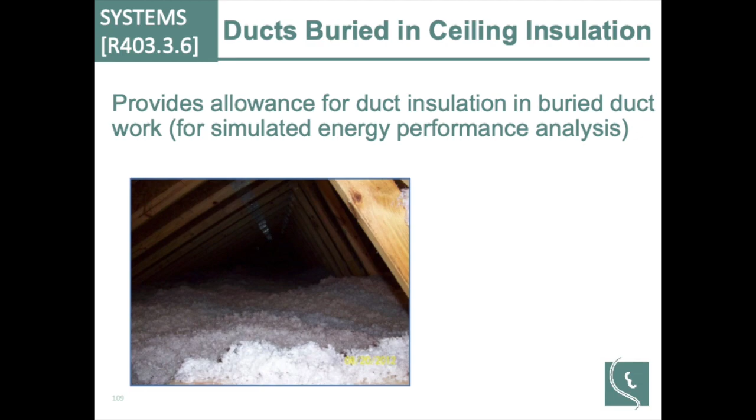So, is anyone doing drain water heat recovery for projects yet? No one yet? Okay. I'll be interested to see how this one takes off, because I love the concept. As far as application, it can be tricky.

With PVC, what this actually is, the drain water heat recovery is basically an entire unit that you just put the Fernco couplings on the end of, and transition from the PVC into the drain water heat recovery unit and then back out into your PVC. So it's like a copper heat exchanger? Copper water-to-water heat exchanger. It's just a coil of pipe wrapped around the center pipe, preheating your domestic water, preheating the water going back to the showers.

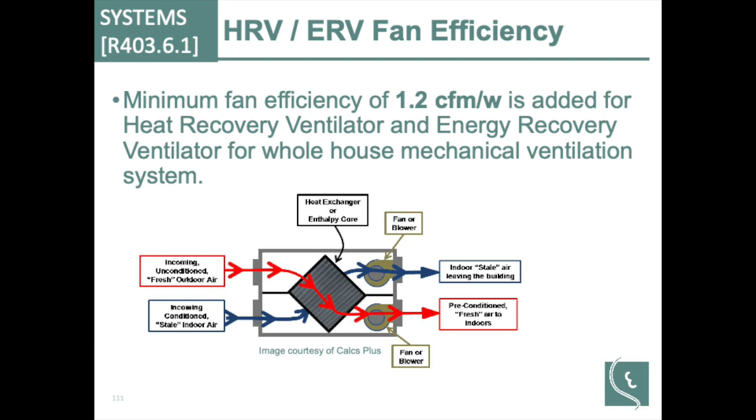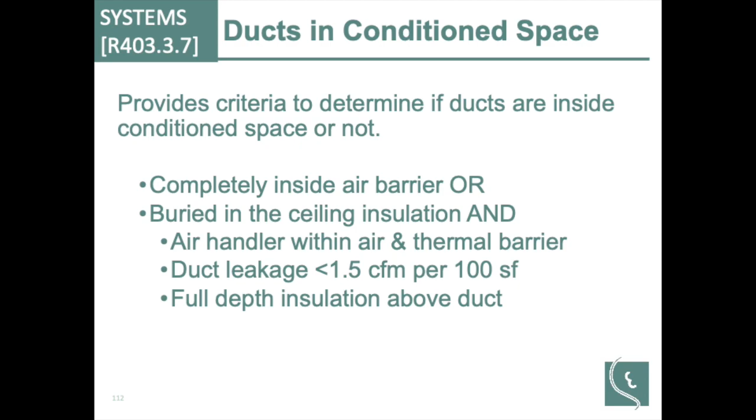Here's how to define if your duct is fully in the conditioned space. Obviously, if it's inside the air barrier, you're inside the conditioned space. But here's where it's buried in the ceiling - this is your fully buried ductwork. Here's your checklist to see if it qualifies or not: again, very low leakage, and the air handler has to be inside the thermal envelope too. So if your air handler ends up in the attic, you're done, unless your insulation is on the roof rafters.

Equipment sizing is now required. Pool cover requirement, similar to commercial, up to 75% now. High efficiency lighting - this is a provision where there's also an Illinois amendment, and that is they've redefined what high efficiency lighting is. For the state of Illinois, it is proposed to be 55 lumens per watt for a fixture and 65 lumens per watt for a bulb or lamp.

It's 55 lumens per watt for a fixture and 65 for a lamp or bulb. The way this will be rated on lighting fixtures is called efficacy, not efficiency. Just so you know when looking at product data, that lumens per watt rating will be called Efficacy.

Going back to this, LEDs are now 80 plus, even more than that - 100, 125. Some of them are over 200 now. But that's not the call, so you start to look at it and say, well, I got to be above 55 or 65.

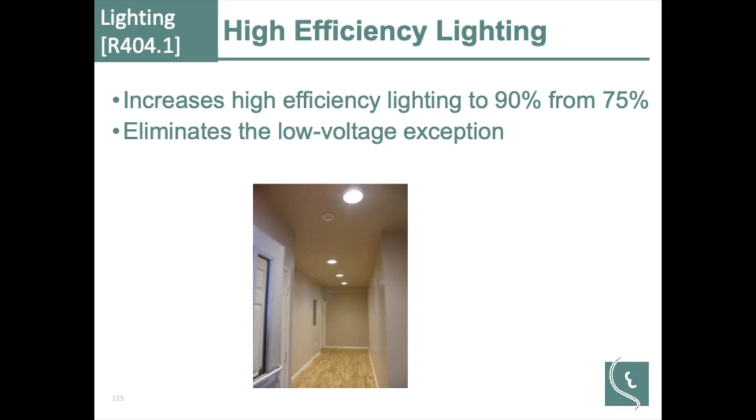Ventilation now has to be in the energy model for residential, if you're going that way.

If you are doing modeling, they now allow you to do sampling. So if I've got two apartments next door to each other that are identical, facing the same way, I don't have to run two separate energy models. I can just run one and say it applies to both units. For larger projects, this will come in handy.

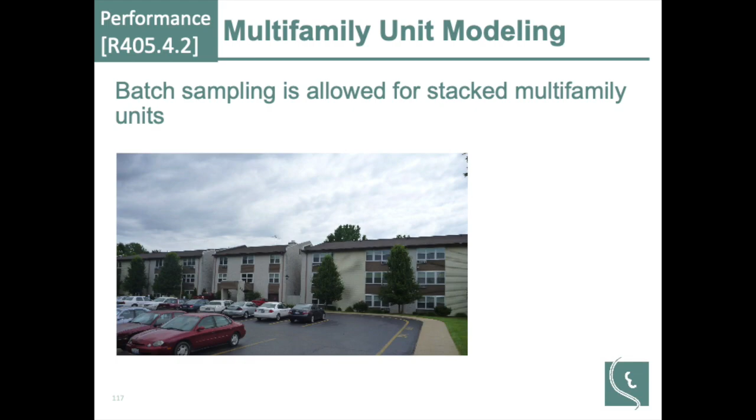And if I'm going to include ventilation in my energy model, the reference that I'm comparing it against also includes it now. So we added it to both sides of the equation.

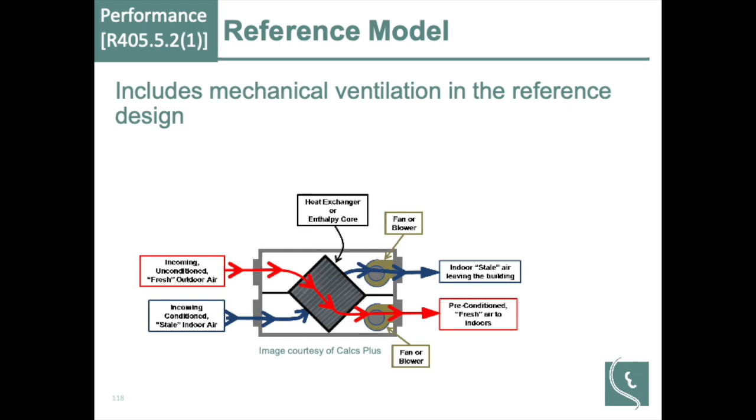This is one of the bigger ones - the energy rating. Similar to commercial, we are going to exclude electric vehicles. ICC is also teamed up with RESNET, so the standard is now an ICC standard, not just a RESNET standard.

So what this would actually do is, if you go the HERS route, that may make your building a little worse than code and still qualify. Possibly.

But in order to get a HERS rating, that score has to be registered into the national database that you can now look up. So when you go to sell that house, that score is known, or at least searchable.

Personally, as a future homeowner, I really wish this score was posted on every sign to say, okay, the house may not be pretty from the road, but I'm looking forward to the lower energy bills. So...

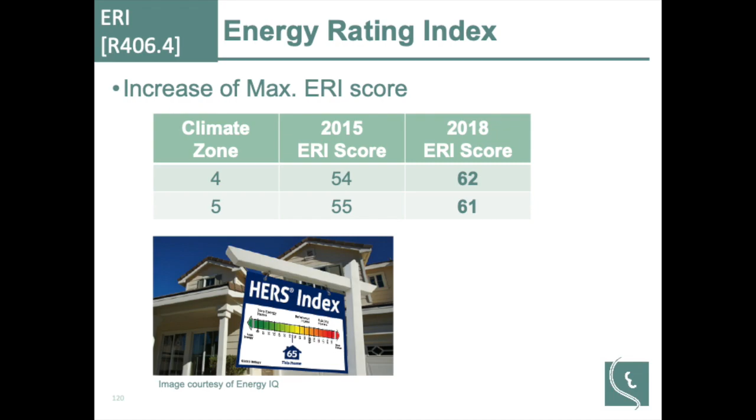Change in softwares happens over time. Fenestration for residential.

You can use a weighted average. So if you have a building that's not quite as good, or a nice decorative stained glass window that wouldn't necessarily meet energy code, you can use a weighted average to say, I like that window that's not as good, and I'm going to use better windows over here to make up for it. A little bit of a trade-off.

Insulation - here's where the code does call out that it has to be at least an R3 per inch, which pretty much almost every insulation meets, at least, or better. Again, provided that the cavities are filled, you can have a lower R value as long as you fill it, or you can meet the R value and not fill it. Either way.

Do the same occupancy - you don't change that, but if you don't touch the exterior, you can just let it be as is, right? Correct. If I didn't expose the wall, I don't have to touch it. But if you change the occupancy and didn't expose the wall, would you still have to upgrade it, because you didn't touch it? The changing occupancy doesn't trigger it.

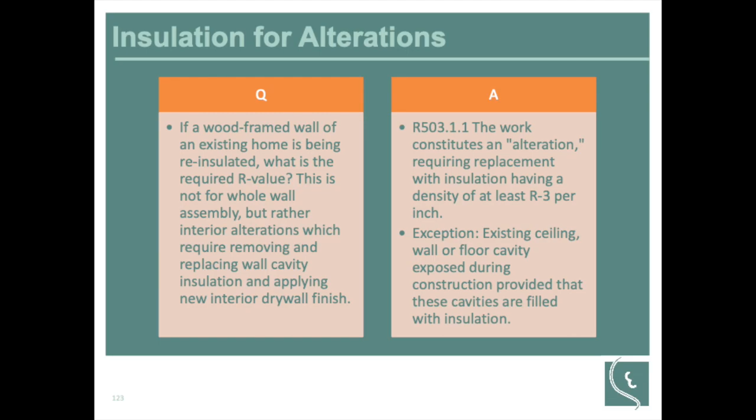Air leakage continues to get a little bit tighter. We're now down, the anticipation is we're going to be down to 4 air changes per hour from 5. It's anticipated this amendment on air changes per hour will go away in the next code cycle, because the model code has it at 3. So we'll have gone from 5 to 4 to 3. When they changed and went to 3, it was from 7, which is why the state of Illinois said, whoa, let's go to 5 first, not all the way from 7 to 3. Now we're going to step down.

Also for smaller residential, multifamily apartment buildings, air changes per hour gets weird the smaller you get, because your surface area to volume ratio starts to skew. So instead we're going to look at an envelope leakage rate and say, how tight is the actual envelope? I don't care about volume, I care about how leaky the envelope is.

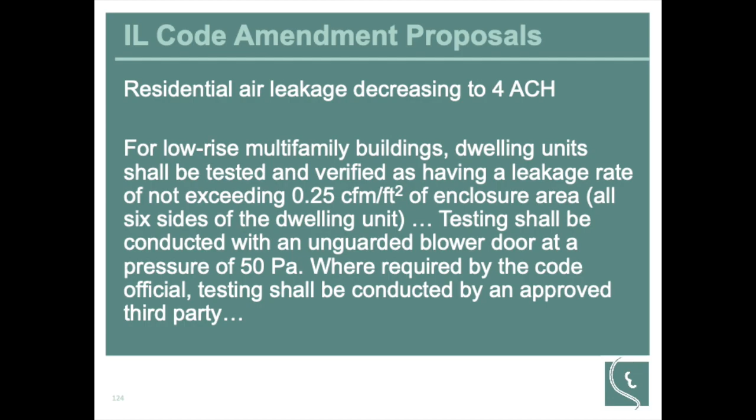And allowing that, for more than 7 units you can actually do a sample, rather than having 30 units and testing every single one. That takes a while and costs money.

Sealed crawl spaces — this is one that's come up as far as encouraging sealed crawl spaces. We run into problems with indoor air quality issues, but because energy recovery ventilators or heat recovery ventilators are now required, or nearly required, you do have to ventilate. Heat recovery doesn't necessarily have to be that way. Since you have to ventilate anyway, instead you draw the stale air out of the crawl space and pull air from the conditioned space through the crawl space and then vent it out. So I get my air changes, even on days I don't have any air conditioning.

Yeah, this is actually my house here. In a year, 27% of the year I had 15 minutes of heating and air or less. So if I just had typical ducted ventilation, I'd have a lot of the year with no ventilation, which would be a problem. So this is one option we look at — if I'm going to ventilate, let's use that ventilation to have air movement and prevent mold or stale air in a crawl space.

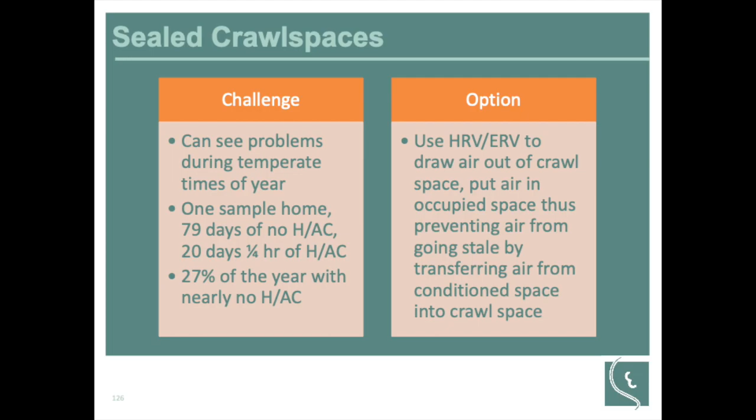Other questions we've got?

This takes effect March, anticipated March 1st, 2019. So if I have a 170 unit building right now, and we have to do IECC corridor testing — excuse me — can I do sampling on it? Because it will still be in construction. What is your building permit date?

Generally they'll look at your permit date for whether you can, but technically 2018 is a more stringent code — so can I follow the current more stringent code as opposed to the permit date, which is right now? It would be up to your code official whether he'd allow that, because what you'd run into is, does the rest of your building meet 2018? You could potentially end up cherry picking, saying I like this provision of the new code but don't want to take the rest of it.

So it would be up to the local jurisdiction if they want to grant you an exception to allow that. Otherwise, it could be such that they say, if you want to take advantage of that exception, I have to reevaluate the entire building based on the 2018 version, because you don't get to take that one provision and not the rest of it.